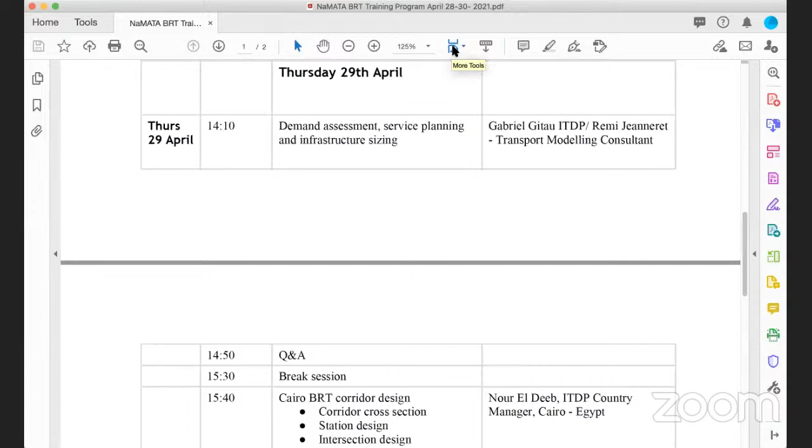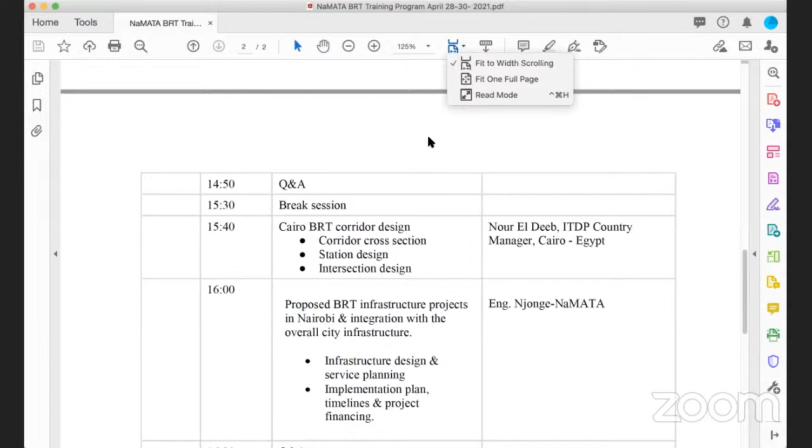Thank you. So today we'll look at demand assessment, service planning, and infrastructure sizing. And we did say that for this session, the workshop is focusing on BRT planning. Would love to tackle everything else, but it's not possible. After that presentation by Gabriel Gitau and Remi, we'll have a Q&A. Today we'll have a break of 10 minutes, hopefully. And then we'll listen to Cairo's experience on their BRT corridor design. So it would be useful for you to capture some of the expected standards for designing, and then we compare what Cairo's experience has been like.

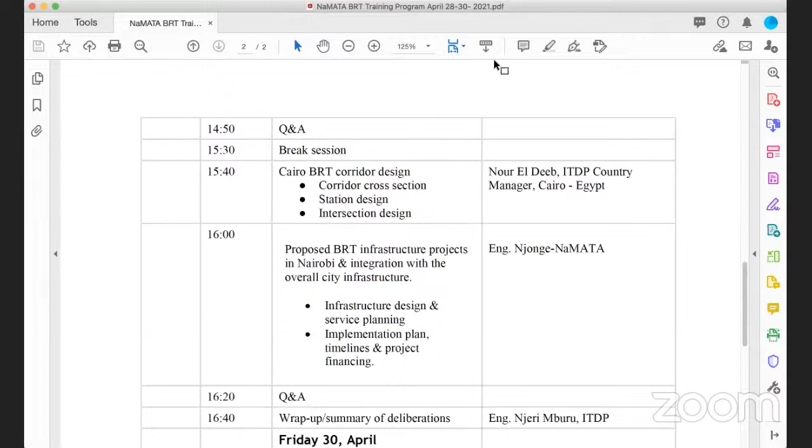At 4 o'clock, we are looking forward to having NaMATA again. Engineer Njonge is going to present to us NaMATA's infrastructure designs and service planning. And he's also going to give us a snippet of the implementation plan, timelines, and project financing. I believe this is for BRT line 2, but when we get to that, it will be clarified. Then we'll have another question and answer session. And after that, we'll have a wrap up. So that's what we are doing for this afternoon.

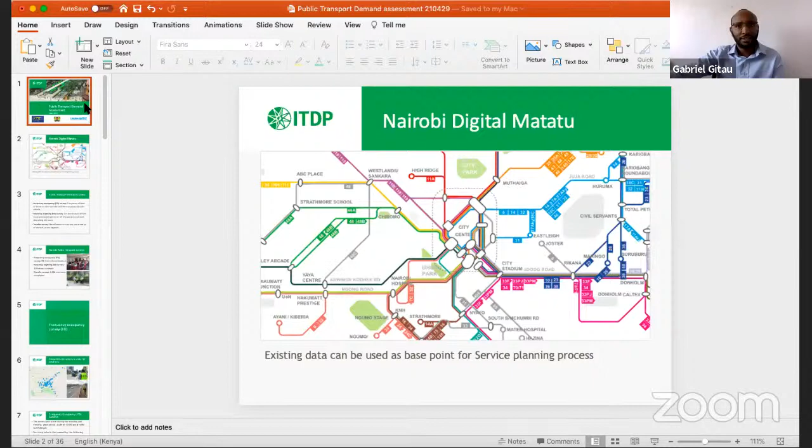So just confirm if you can see my screen from your side. Yes, if you could put it on full screen.

Okay, thank you. So I'll take you through the public transport demand assessment. This is the initial step that you take whenever you're doing your public transport planning. The demand assessment gives you an estimate; you're able to find out what is happening on the ground, the current trips which are being made. And I'll take you through the process of how you collect data, and our transport modeler is going to take you through the modeling exercise. I'll give case studies from Nairobi. We did an exercise in Nairobi and also in Mombasa.

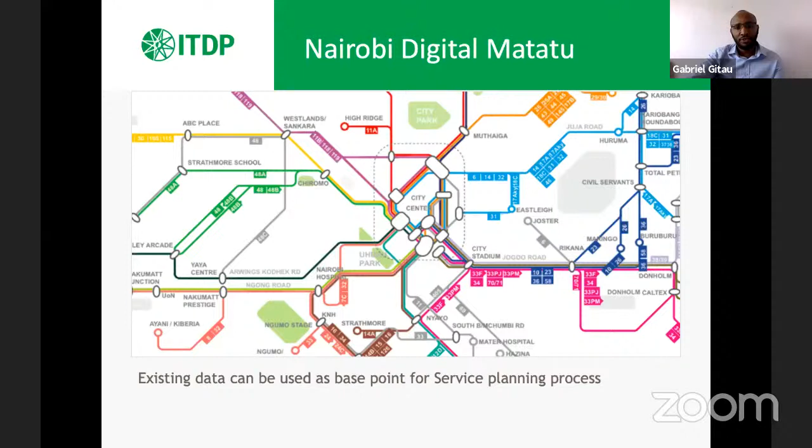So for Nairobi, we were lucky, we had the Digital Matatus. This is an online platform which had all the existing matatu routes. So Digital Matatus had given all the existing matatu routes which are in operation in Nairobi, and this was the starting point of our data collection process.

For the public transport demand assessment, there are various kinds of surveys which are conducted. We have the frequency occupancy survey, and this is a survey which is done to determine the frequency of buses or taxis, and in Nairobi, it's the frequency of matatus which are plying the corridors, and you're also able to determine the occupancy of the passengers on each vehicle. We also have the boarding and alighting survey, and this is an onboard count of how many passengers get on and off the buses at each stop along the route.

We also have the transfer surveys, and these are done to identify the trips which are made up of more than one segment. So these are the three kinds of surveys which are very critical in the assessment of your public transport demand.

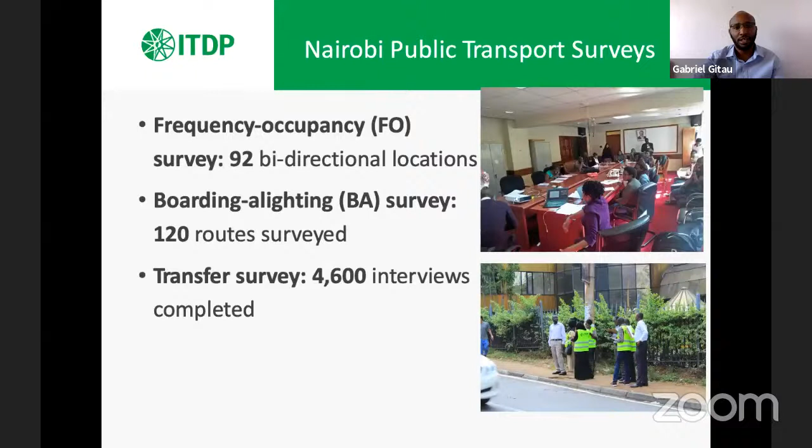For the case study for Nairobi, NaMATA, in collaboration with ITDP, conducted the frequency occupancy surveys. We had 92 locations. We did the citywide FO counts. We also did the citywide boarding and alighting surveys. The surveys were conducted on a total of 120 matatu routes that are in operation. And for the transfer surveys, 4,600 interviews were completed during the public transport assessment. I'll take you deeply into how the surveys are conducted, starting off with the frequency occupancy survey.

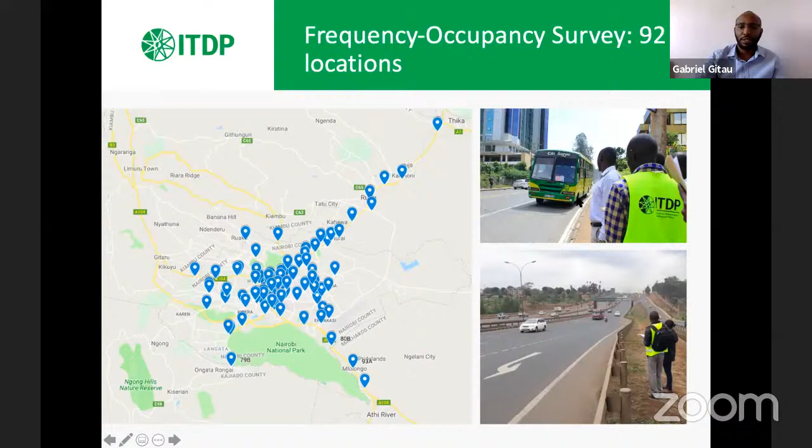This is a map which is showing the locations which were selected for Nairobi. The surveys were conducted in 2018, 2019. We had 92 locations, and these locations were based on the routes where the current matatu operations are occurring. So surveyors were positioned at these 92 locations, and they were capturing the data on the existing public transport routes. You can see this photo is showing an example along Thika Road. This is one of the locations where the surveyors had been located and were capturing the data.

So the frequency occupancy surveys were conducted during the morning and the evening peak period, that is from 6 a.m. to 10 a.m. in the morning, and in the evening peak period, between 4 to 7. And for the survey methodology, the surveyors were capturing the details of the public transport vehicles which are passing the count location. For each vehicle that passed by, the surveyors would capture the vehicle type. They would also capture the origin and destination of these matatus. And for the case of Nairobi, we have the matatu route numbers or the sacco name, so that was being captured in the survey. The surveyors would also count the number of passengers who are on board the matatus and also record the time.

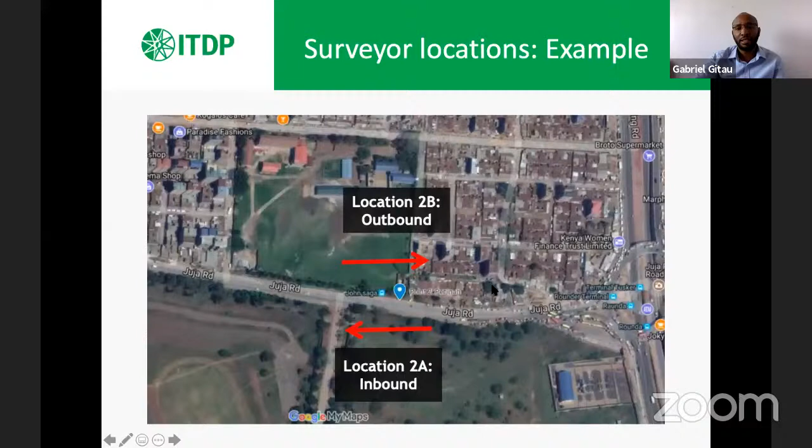So this is an example also of how the surveyors were positioned. They were capturing data in both directions. This is how you capture data: you capture data both in the inbound and the outbound direction. So for each survey location, surveyors are positioned on both sides of the road, and they capture all the public transport data of the vehicles which are passing that survey location. For counting the passengers, you do a quick count on the number of passengers who are on board. And if most of the seats are empty, you just do a quick count of the number of passengers who are seated in the matatu.

Then if most seats are full, you can count the empty seats, do a quick math and subtract from the total number of seats in the vehicle, and you'll be able to determine the number of passengers who are on board. Then if all the seats are full, sometimes you can have a corridor where we have even standing passengers. The way you obtain the occupancy is by counting the number of standing passengers, and then you add that to the total vehicle capacity.

So this is an output from the surveys after conducting this frequency occupancy. It gives you the existing public transport demand, and you're able to determine the number of passengers who are using the public transport vehicles along your corridor. So this is an example. This is the survey output from the frequency occupancy. This is along Thika Road.

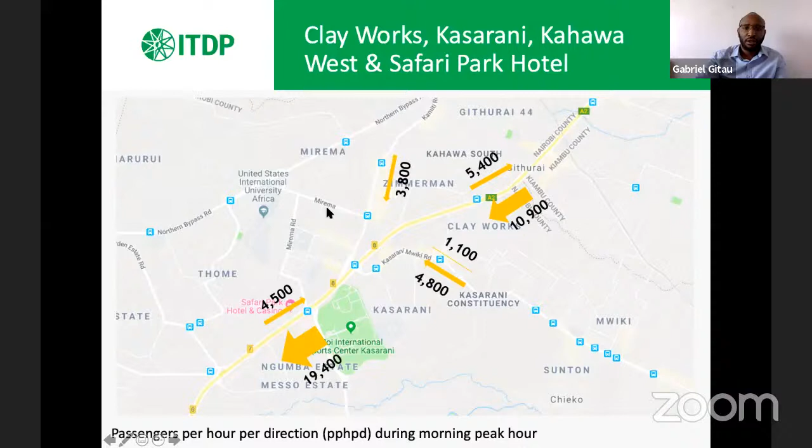We had counts near Clay Works at Githurai. You can see the numbers were about 10,900. And as you go towards town, the figures kept on coming up. Also, if you compare the inbound versus the outbound, this was the morning peak period, and you can see the survey output indicates that the inbound traffic was heavier compared to the outbound direction. This was another survey location at Roasters, also along Thika Road.

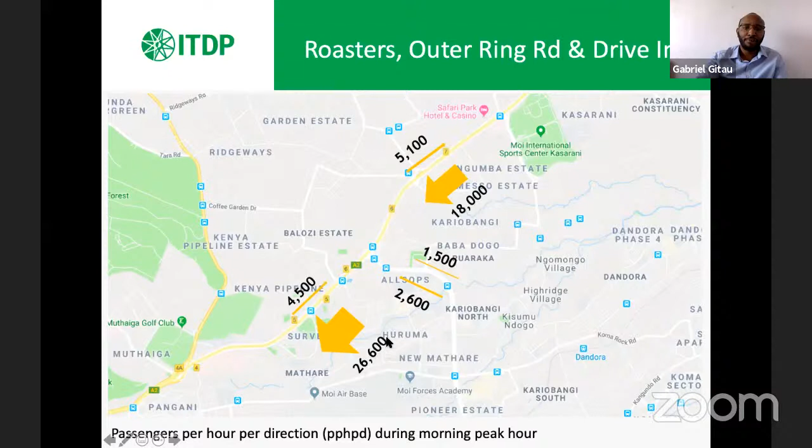We also had surveyors positioned near Allsops along Ring Road and at Drive-In. And this is the area where we had the highest volume of observed passengers, where 26,600 passengers were observed during the morning peak period. That is during the peak hour in the morning. So as you can see, as the traffic keeps on coming towards town, our corridor, that is the Thika Road, has got a very high passenger demand of up to 26,600 passengers.

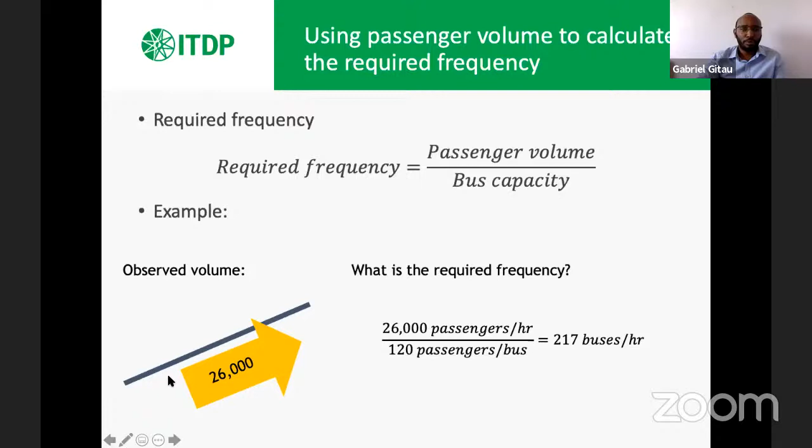Once you've obtained the public transport volumes, the passenger demand, you can use that data to determine the frequency of buses if you want to introduce maybe a bus service. The number of buses required is based on the observed volume against the vehicle capacity. So for example, if you observed a volume of about 26,000, you'd be able to determine the frequency, how many buses would be required along that corridor. Assuming a bus capacity of about 120 passengers per bus, along that corridor you'd require 217 buses per hour to handle this demand.

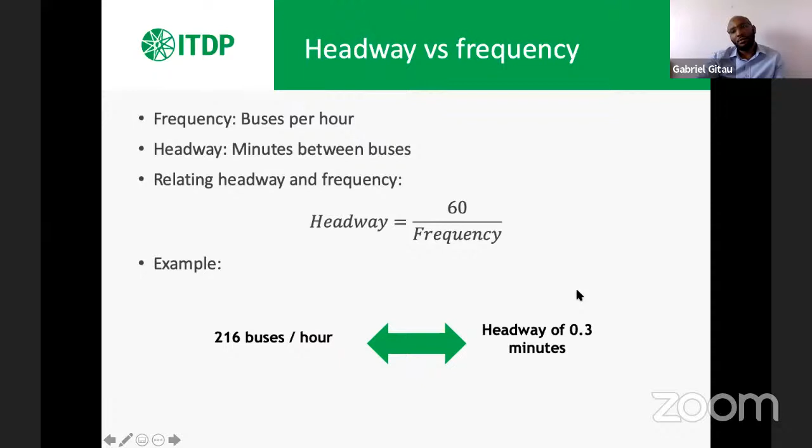The other comparison is the headway versus the frequency. The frequency gives you the number of buses which are required per hour, and the headway gives you the interval at which these buses will be docking at your station. To determine headway, it's 60 minutes, since 1 hour has 60 minutes, divided by the bus frequency. So for example, if you have 216 buses passing a location in 1 hour, these buses would have a headway of 0.3 minutes.

The other data that you obtain from your surveys can be used to compute the width of your stations. And this is the formula which is used. You require 1 meter of width for your infrastructure, that is 0.5 meters for the wall and fixtures on either side. Then you also need to determine the width required for the passengers waiting in the inbound direction, the width required for circulating passengers, and another width for passengers in the opposite direction. So this is the formula that is used to compute the width of your station.

These formulas were there during yesterday's presentation. Chris presented the NaMATA BRT framework. So these formulas are there, and they're also in the BRT planning guide. So we did an example to determine the width requirement on one of the stations along Githurai.

The proposal is to have a staggered station, and we found out that for any given time on one substop, you'd have about 95 passengers waiting between the bus interval. So the waiting passengers would require a width of 1.6 meters. Then the width for the circulating passengers would require 1.62 meters. But in the opposite direction, there will be no width requirement because the station is staggered. And with a staggered station, the docking, boarding and alighting occur on one side.

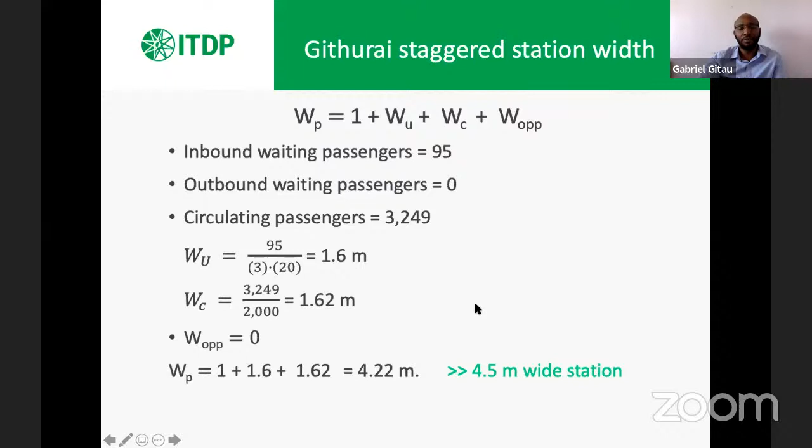So for Githurai, based on the existing demand along the corridor, you require a station which is 4.5 meters wide. The other survey conducted to determine the public transport demand assessment is the boarding and alighting survey. This is an onboard survey which is done to determine locations where people are boarding and alighting. And I will take you through the survey methodology.

We also conducted this survey citywide in Nairobi and also in Mombasa. The surveyors are positioned near the door, and the surveys are done on board. So the surveyor sits near the door, and for every stop where the buses stop, the surveyor captures the number of passengers who are boarding and the number of passengers who are alighting at that stop, and also indicates the name of that stop. So this survey is done on board. You do a complete round trip from the point of origin to the point of destination.

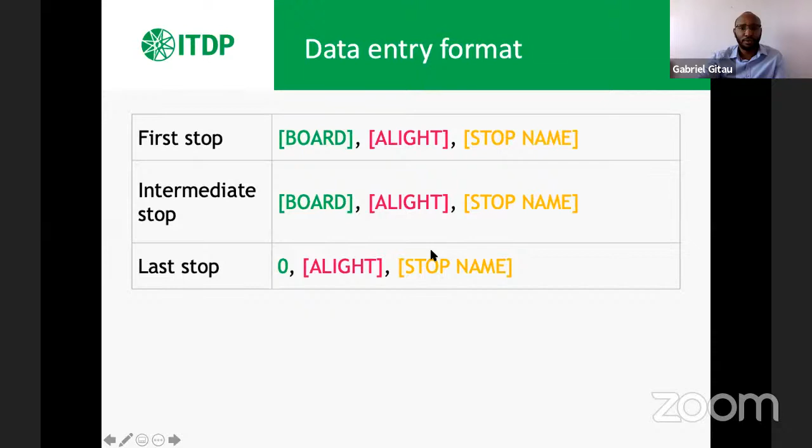This is the format in which the surveyors were doing their data entry. For the first stop, you count the number of passengers who board. You also count the number of passengers who alight at that point, and then you indicate the stop name. You repeat this for all the intermediate stops up to the last stop. At the vehicle destination, the number of boardings would be 0. Then you capture the number of people who alight, and you also indicate the name of that stop location. So this is one complete round trip. It consists of complete inbound and outbound trips.

So for example, if the trip is coming from Thika to Nairobi, a complete round trip would be from Thika all the way to Nairobi, and then from Nairobi back to Thika. We completed 5 round trips for each route in the CBD. So one complete round trip comprises from the point of origin to destination, and also back to your point of origin.

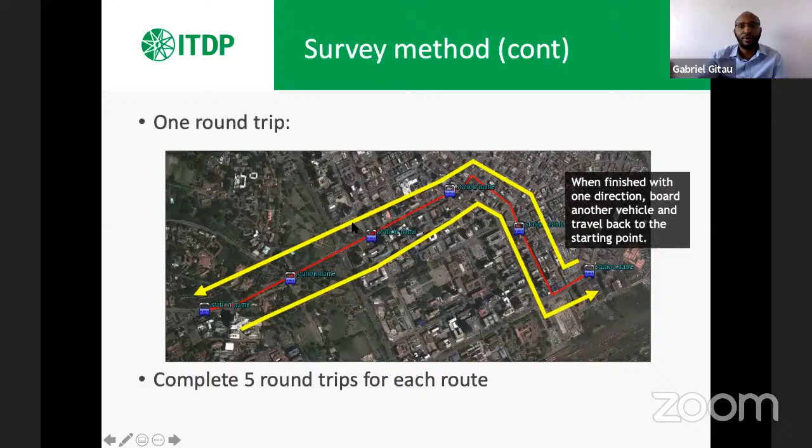For the data collection process, we're using GPS-enabled devices, and these are the applications which we use to capture data. We used Locus Maps for Android phones, and for iPhones, we're using My Maps. These are free software. You can easily download them online and use them to capture your data. This is an example of how the surveyors were able to pin down the waypoints along the survey route. For each location where the matatus were stopping, the surveyors would drop a pin, and you can see where most boardings and alightings are taking place.

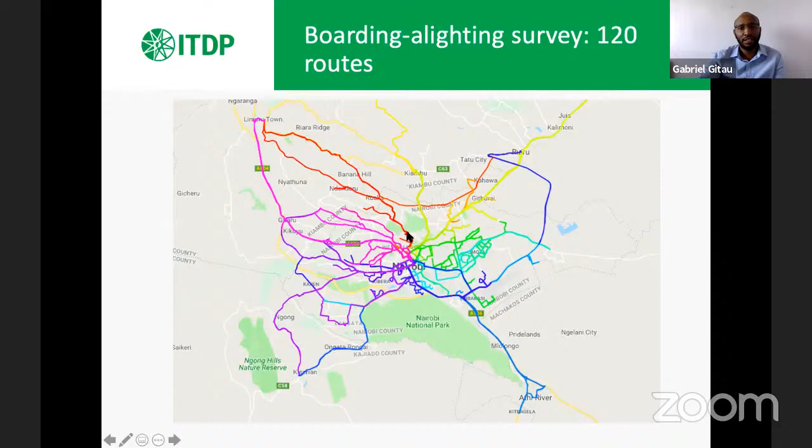These are the routes which were surveyed in Nairobi. We had a total of 120 routes surveyed, and they mapped out all the boarding and alighting locations in the entire city. The other survey conducted is the transfer survey. Assume we have someone who is coming from home and needs to go to school. Mostly what happens, you find that there is always a transfer point.

The reason why we conduct these transfer surveys is to determine the locations where most transfers are occurring. You can also introduce a direct service from the output, and this will minimize the need for that transfer. So by conducting the transfer surveys, you're able to know where people are coming from, where they are going, and determine the transfer points along the road.

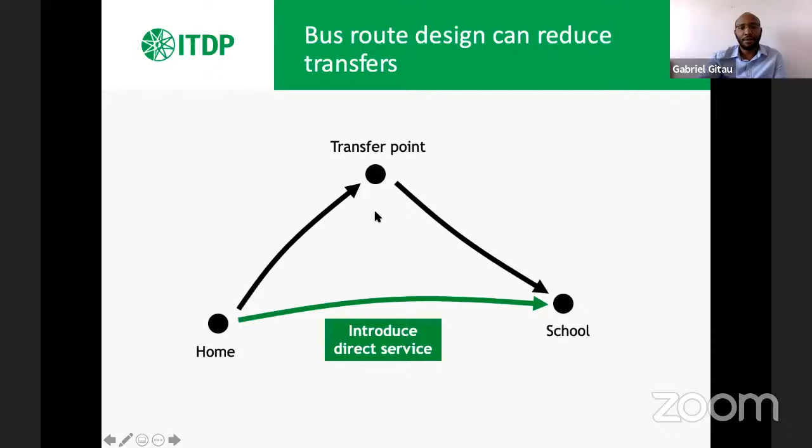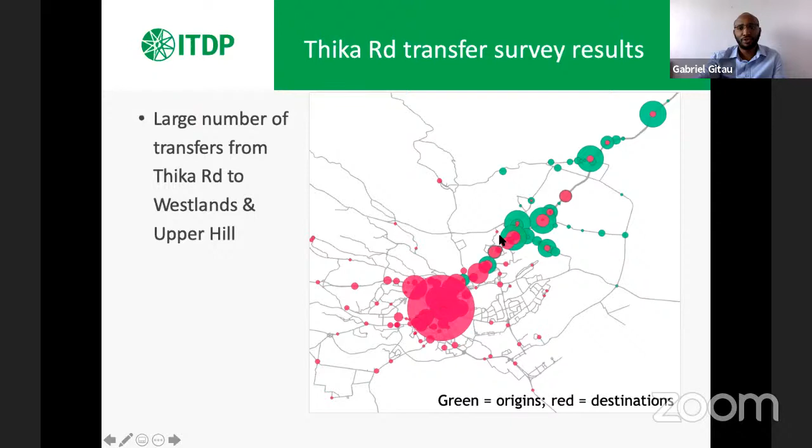This is the output from the transfer surveys in Nairobi. The output indicated that for most people transferring along Thika Road, most of the trips are headed to either Westlands or Upper Hill. But currently we don't have those direct services, so there is a service which can be introduced, and it would minimize the need for transfers in the CBD.

Some of the challenges encountered during the data collection: Thika Road is one of the heaviest. The corridor has a very heavy traffic flow, and it was quite challenging for the surveyors to capture all the vehicles passing the survey location and also determine the passengers on board.

We also had passengers who were not willing to undertake the interviews during the boarding and alighting surveys. Security incidents: one of our surveyors was mugged when we were doing the surveys in Mombasa. We also experienced some hostile passengers, and they were giving some responses which were not valid. So those are some of the challenges that we faced when conducting these surveys.

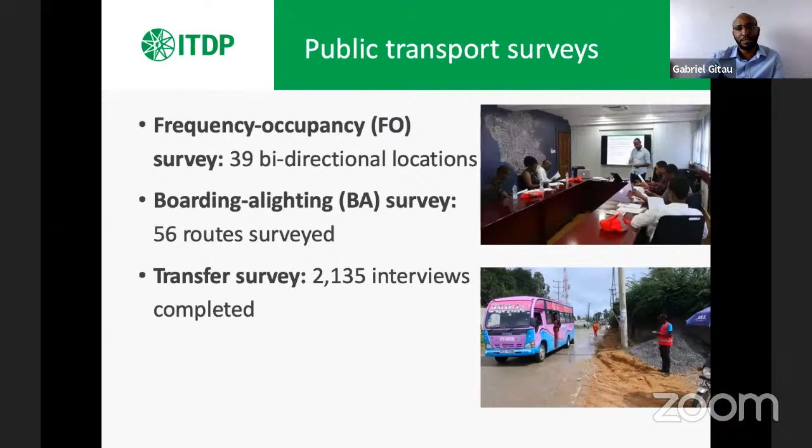The survey output: these are the volumes, the passengers per hour per direction during the morning peak period. And we found out that across the Nyali Bridge channel, that is where we have the heaviest volume of traffic during the morning period, as this is the only access into the island from the north. We also had a high volume of passengers, about 4,800, from the ferry terminals. At the Causeway, the volume was about 3,100. And in the CBD, near Marikiti area, the volume was about 5,700.

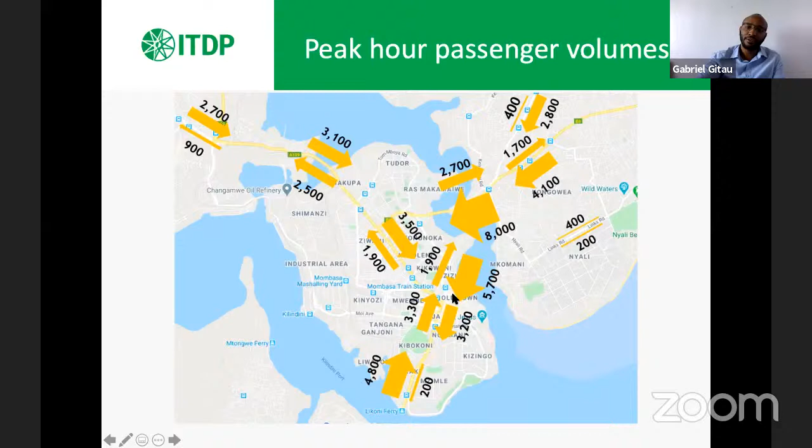We also conducted transfer surveys, and 5 major transfer points had been located in Mombasa. These are the locations where most passengers and pedestrians tend to make their transfers. There was a station at Ferry, Posta, Mwembe Tayari, Sabasaba, and also at Lights. From the transfer surveys in Mombasa, we were able to determine where the trips are originating from. This is an output of the transfer surveys through Posta. The green is the origin of the trips, and most people who were making transfers at Posta were either headed to the ferry or towards docks, that is towards the port.

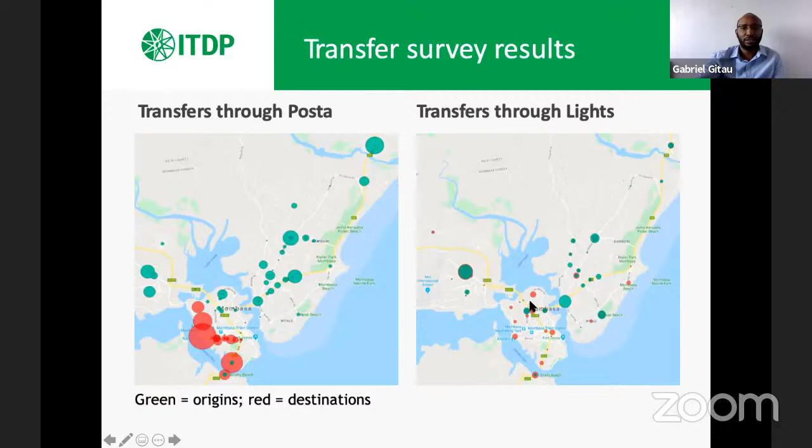Then we also had transfers at Lights. Most people were destined either towards Magongo area or towards Kongowea Market in Mombasa. And that is how we conducted the traffic demand assessment. Now I'll invite our transport modeler, Remy, to take us through the service planning and how we do our infrastructure sizing. Thank you.

Hello, everybody. My name is Remy Jameret. I'm a transport planner and modeler. I work with ITDP in different places and here in Kenya. And we developed a methodology to be able to get a model through all the data Gitau presented. Because in a lot of places we don't have information available, like a household survey, or in fact we don't have an OD matrix. So we developed a methodology to be able to generate a matrix based on this information.

And this process is very detailed and efficient because we are based on those surveys. Basically, we are based on the boarding and alighting survey, which is a very precise survey. At the starting point, we don't use a specific zoning. We base the analysis on the stops where people board and alight, and then we can aggregate later if we want. But we get very precise information because all is based on boarding and alighting.

In fact, what we do is use the actual demand and dimension the system with the actual demand based on actual numbers, and we include some reserve of capacity to be able to grow with normal growth. So by now we didn't go through this exercise of estimating future demand, which is something we can do later and discuss with authorities about all the hypotheses we can consider or not. But by now, with actual demand, we are able to dimension the system and to propose, to recommend what we need based on the demand.

So this is the step we do by now. Then with this, once we got the matrix, we introduce the future network, so we propose some scenarios.

We have done Thika Road in Nairobi, where we worked a lot on different configurations. We have a very high number of passengers in Thika - with the proposal, we are around 30,000 pphpd, so it's a very huge corridor. Based on those numbers, with the modeling, we know all the boarding and alighting by station and the frequency of the different routes, so we propose different operational designs for each situation.

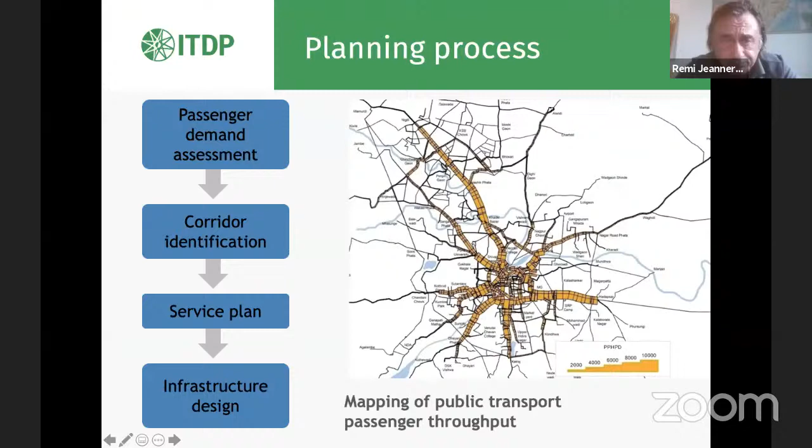So in the case of Thika Road, we simulate some express services. We plan to do a BRT corridor with a passing lane at stations because of the very high volumes. We got different kinds of services which are express, and we also check some direct service to other parts which were identified in this transfer survey. For example, in Thika we had a lot of trips in the AM peak with destination to Parklands and Upper Hill.

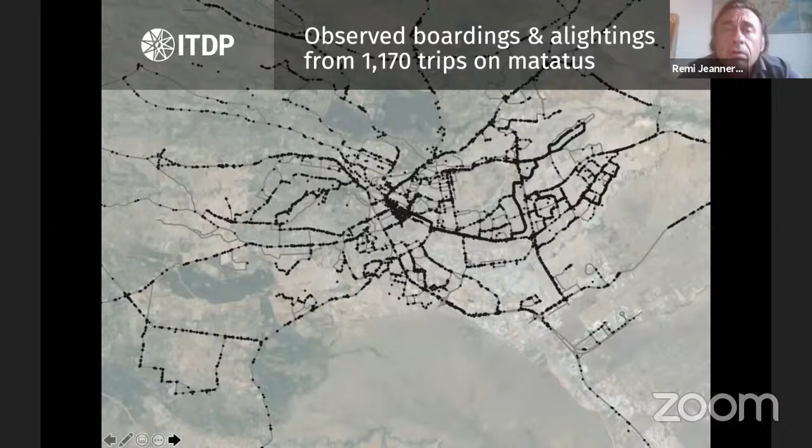So we introduce different kinds of... okay, those maps here - this is where the boarding and alighting were observed. All this is introduced in the model. So this is the basic boarding and alighting survey that we expand with the frequency of each route direction. So this map here shows the boarding and alighting that are directly extracted and expanded from the survey.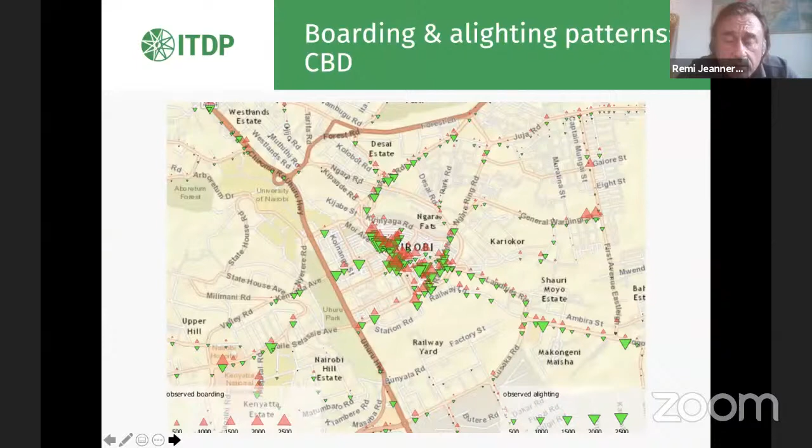As I was telling you, this is very precise information. You got really the location where the people use the bus, which is very useful. We can aggregate this later. Okay, this map here is...

Another point which is very important in the model is to define the speed, because with the actual speed, a map like this is already a kind of diagnostic, where the speed is very low. We can identify the worst places. Of course, the most benefit of the project will be where we got the lowest speed.

The speed is also very important to estimate the benefit of the project, because this is how we calculate the total time offered by the new project. We can compare with the actual situation. So this information of speed is really crucial, and we got this information.

It depends, but for example, we can get this from GPS, and this is also very precise information, linked by direction. We cannot use in a model a global speed or something like this. It really doesn't work. So this is really precise.

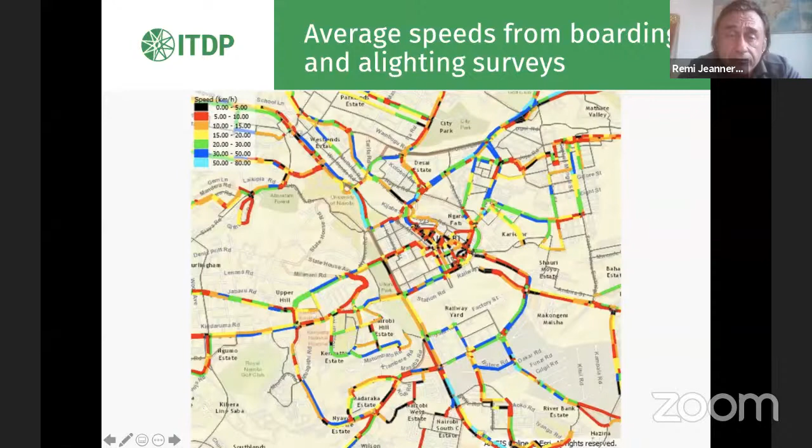Another way to obtain this information, if we don't have GPS data, is for example with the boarding and alighting survey, we can register the time. So we are able, based on the boarding and alighting survey, to also calculate the speed along the itinerary of each route. This is a survey, we got different ways to obtain it, and we need also something very precise.

So after all this, we of course do the calibration for the current scenario, where we compare the number of passengers on all the principal roads with the model passengers. We adjust this model to calibrate it to represent the actual situation. Then we can model and test some different scenarios for the future. So I think that this is the calibration.

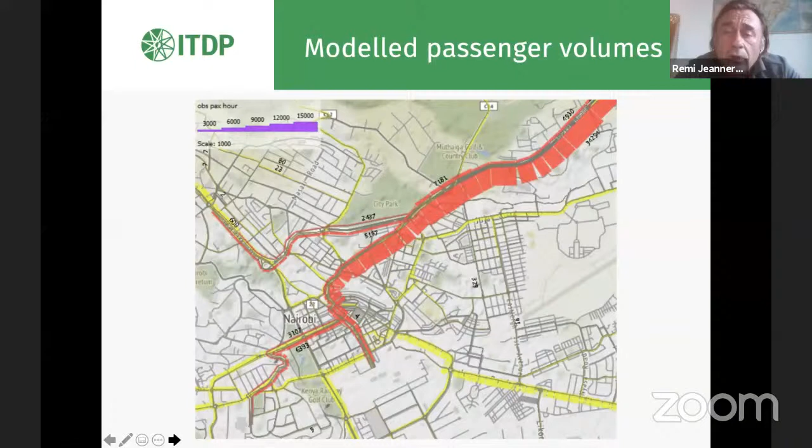So this is a proposal for Thika Road, where you see we had like 34,000 pphpd. It's very high. Also here we join different routes from different neighborhoods to run along Thika, so of course it increased the number of passengers compared to the current situation.

We proposed different routes, and these are the routes. You see all these neighborhoods, we take some passengers from different places where actually they maybe have another option to reach the downtown. So this generates those volumes.

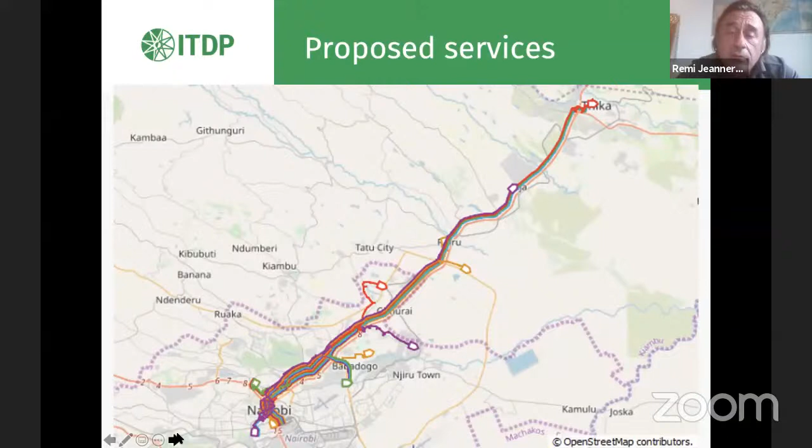Once we got the volume of the infrastructure of the proposed BRT, we can, in fact, dimension the system based on those results. So of course, the dimensioning of the system depends on what kind of operational design we propose.

So this is an example of routes that is proposed for the BRT: fleet size, frequency. In this example here we got maybe 12 routes or something like this around Thika Road. So this is another one.

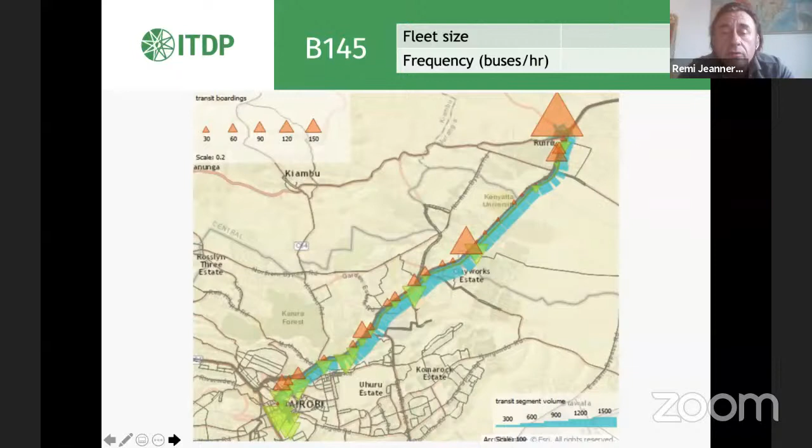So each of the triangles are boarding and alighting. This information is used at the end, the boarding and alighting for each station, to dimension the station. Gita told you about the dimensioning of the station for the height of the station. But here we're talking about how many substops we need, what is the configuration, what is the saturation at the station, and if we need an overpassing lane or not.

So we had discussion recently with different people about Thika Road, about the project we need to implement there, because based on all the simulation we had and all the different scenarios we could run, one thing that really is the conclusion is that the volume there really needs a BRT with very high capacity, and we really need to have an overpassing lane and an infrastructure which allows to grow and to also develop the system in different directions in the future, to join with other corridors.

And really incorporate Thika Road in a network. So this slide here is about the design. Of course we got different ways. We got the trunk and feeder way, which is what's used a lot, and it is still used, because in fact in the BRT system you got a lot of considerations to take into account. So some places like in Bogota, in Transmilenio, you got a trunk and feeder service.

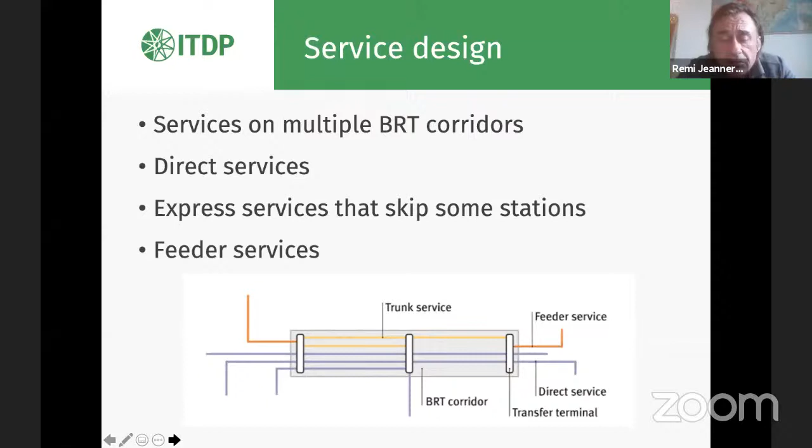This is the case here in Nairobi and also in Mombasa, where we have only direct service. We don't have trunk and feeder in this situation.

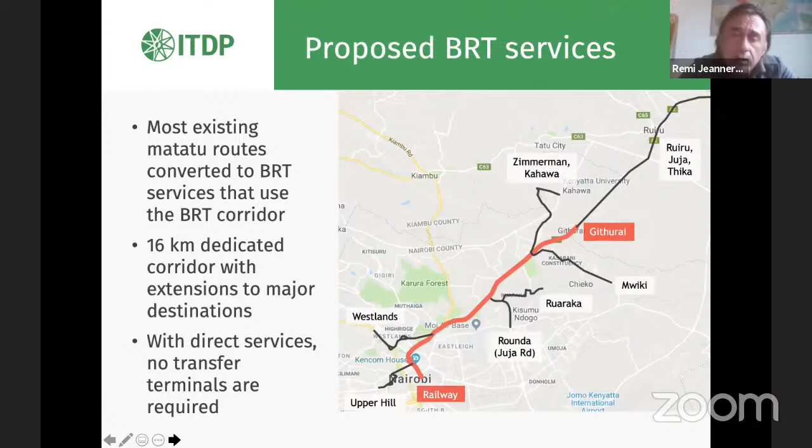So what we have done for the proposed routes is basically base this analysis on existing routes. We join some existing routes or extend some of them, using actual routes in the different neighborhoods. Here you can see Mwiki, Zimmerman - all of these are existing routes. We keep those itineraries of existing routes and include them in the BRT lane.

We also have direct service crossing downtown. So we got 12 routes in this system.

In Bogota it's a little specific case, because we have a passing lane all along the way, which is not needed for Nairobi, but we definitely need passing lanes at stations and several sub-stops.

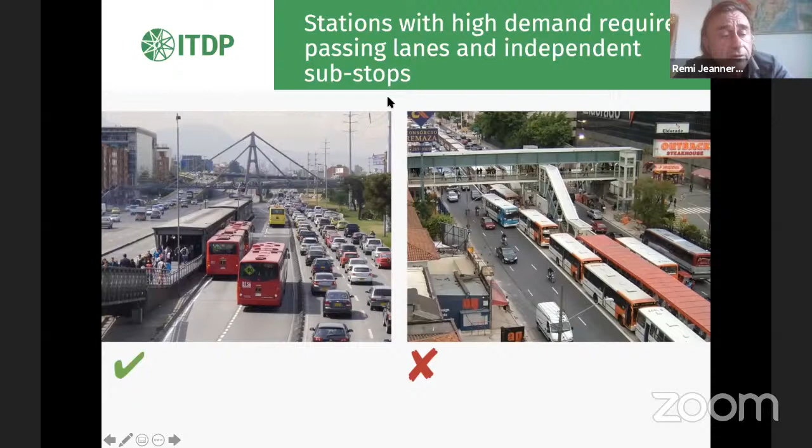For this project, we estimate dimensioning for stations. This is a scheme for high-demand stations, explaining how buses stop - at each stop you can stop 2 buses. This way of keeping 2 buses at each stop allows you to increase capacity a lot, in fact around 40% compared to having only 1 location per stop.

And what we need to define is how many stops we need. So this is Dar es Salaam - we also worked with ITDP for the BRT in Dar es Salaam.

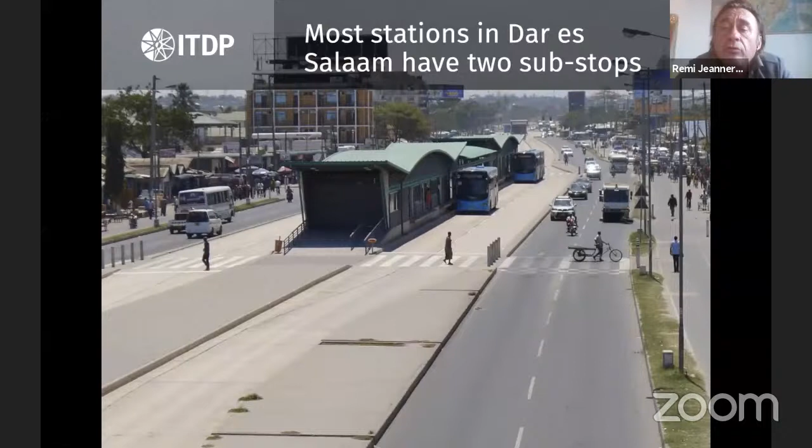We also made a model there, which wasn't exactly the same methodology, because in Dar es Salaam the matrix was based on an onboard survey, which already included the transfers. So it was a little different, but it was also a good matrix that we have there.

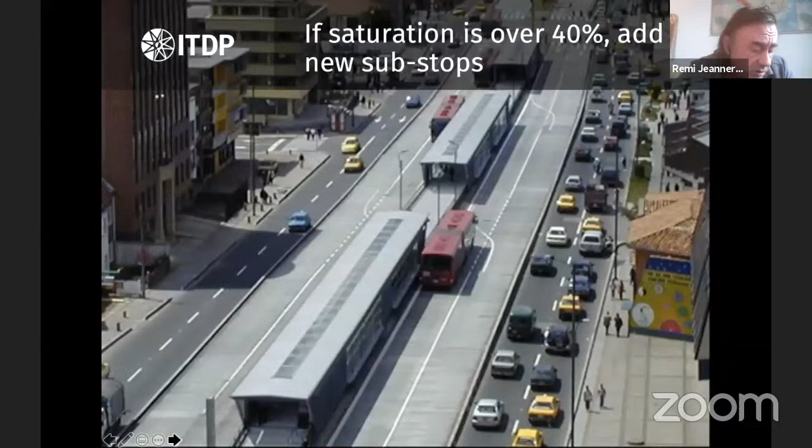In Dar, it's the same situation - we have overpassing lanes at each station, unless in downtown where we have a lot of restrictions, so we don't. But globally, everywhere we have passing lanes.

This is something we estimate directly from the model. The saturation that we use to estimate the number of sub-stops is 40%. This is based on observation, defined after Bogota was implemented, and then confirmed in a lot of different BRTs around the world.

This is the saturation you need to use to dimension. You need to dimension at low saturation to account for all the irregularities you can have in a very concentrated peak. So dimensioning needs to be made at a low saturation of 40%, and in this table we see how we calculate this dimensioning.

All of this is extracted directly from the model - this is information that is output from the model. We get boarding and alighting, inbound and outbound each direction. Then we get the frequency of the buses, and we define for the routes which type of bus we need. Then we calculate the saturation, based on the number of boardings and alightings and frequency at stops and stations.

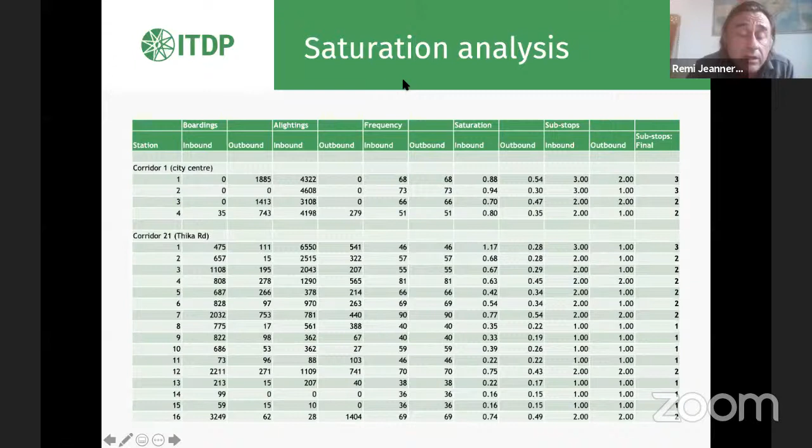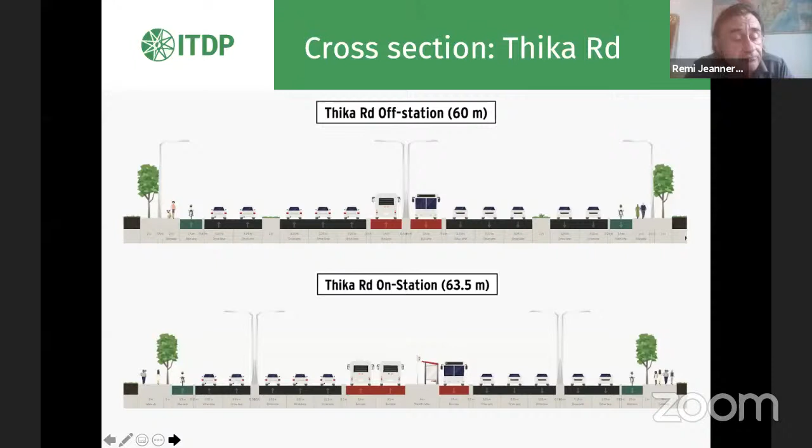So this is the cross section in Thika Road. What is proposed? So you see the way we can reduce the dimension for the BRT is to offset the stations. We don't have a specific problem. We got one lane by direction, and for the stations we can split the stations so that we can have only 3 lanes instead of 4 lanes. So we can win some space in this situation.

You see, this is okay in an avenue where we got space. So here we got a central station with 2 lanes on each side. And in Thika Road, we got some stations which are split, and we got only 3 lanes.

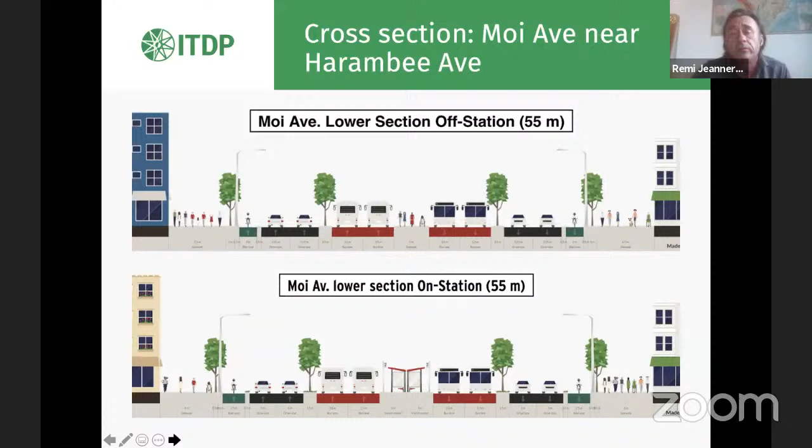So we always, depending on the demand and the numbers we have and the conditions in the situation, try to find the solution which best corresponds to the demand and the local conditions. So if we need to split stations in a lot of places, we got this configuration here with 2 lanes in one direction and 1 lane in the reverse direction, which allows us to implement a BRT with high capacity, and we can reduce the dimension of the infrastructure to allow the other lanes for cars and general traffic.

So okay, Remi, we are running out of time. If you could summarize, fine, please. Yes.

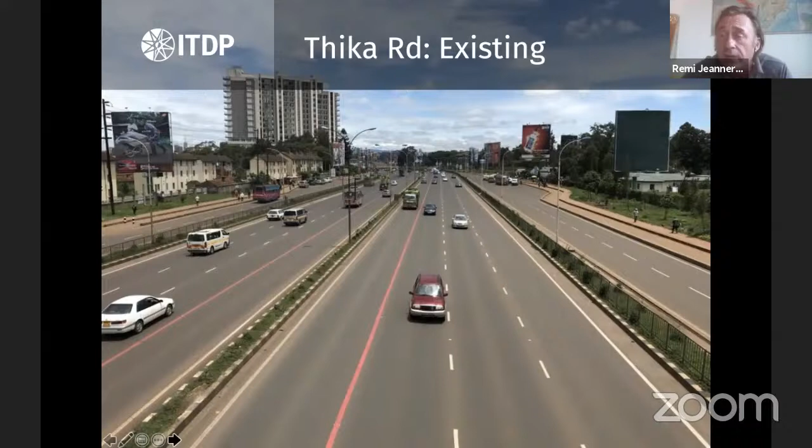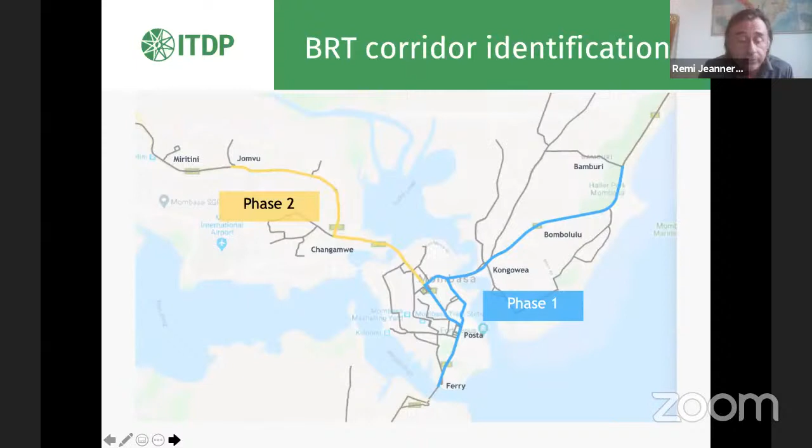So that's all the process we have done. What I want to say is that building this model and this database takes time, but once you have done it, which is the case now, you can simulate a lot of things, whatever you want. So we have done some different exercises in Nairobi, for example, with another corridor with Juja Road, and we have done some other simulations based on proposals that were done, like the Matatu ban in the city center.

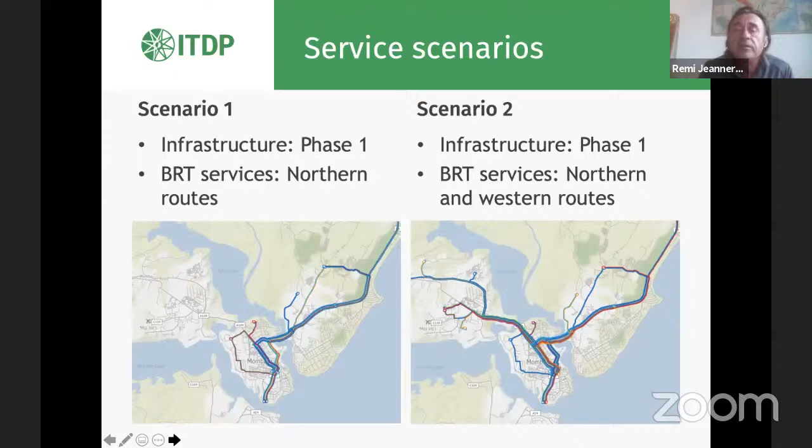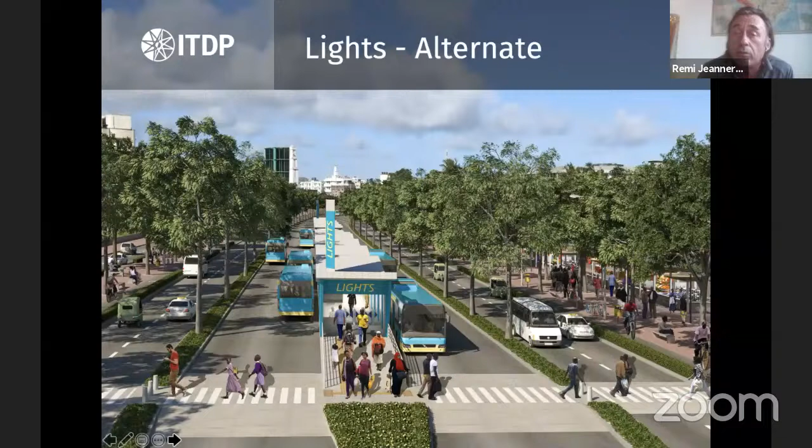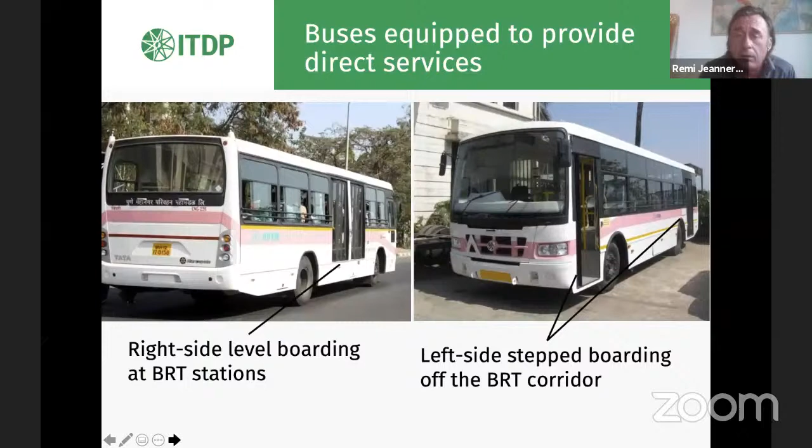So we have done different exercises and simulations because we got a model which is totally ready, and we can run every corridor everywhere in the city. So this is now very useful, because very quickly we can get answers, like, let's do the Matatu ban. Maybe that's not the idea. What should we do? What should we test? We can test a lot of different scenarios and compare and really decide which one is the best. So that's the exercise we need to do now, and we got everything ready to do this. So that's now the interesting part.

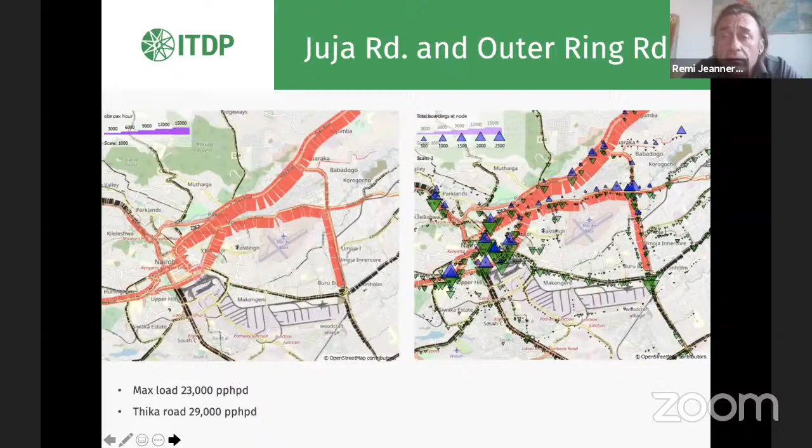So here you can see this is an example of Juja Road, with a proposed BRT, an estimation for this corridor. So this can be done for all the city. And these are some results of the model on Thika and Juja. So that is what we got for the modeling.

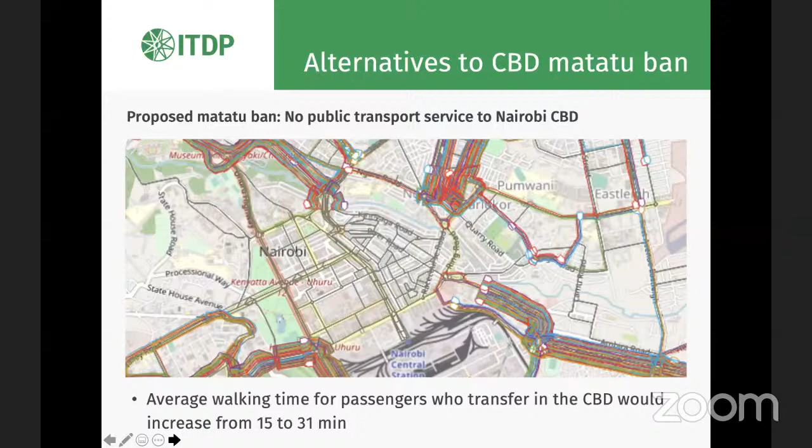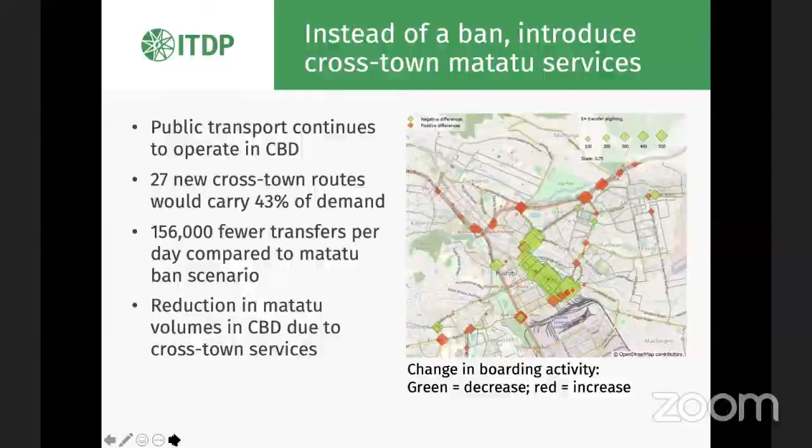Thank you, Remi. Thank you, Gabriel. Like I said, this is going into depth, and I'm hearing them say that they have all the simulations for the whole city, but I'm sure government is not prepared to work with the whole city. I think we are doing a level of piloting and experimenting, beginning with BRT line 2, but that was indeed very, very informative.

I'm sure we have some questions that people have raised that I'd like you to dive into immediately. So if Gabriel can start us off, and maybe my first one, given that your modeling was done on the corridor Thika Road, and you've recommended a certain level of service with, I think, over 100 buses, if I'm not wrong.

If government is not able to implement it at full scale, how can we address it incrementally and still get the full scope of the desired standard of the BRT system? You know, the important thing, I think, is the infrastructure, because in different places, when we discuss this, we always say, let's do only one lane and one station without passing lane, and we will do some regulation or something like this, which was some proposal that was done for Juja Road.

You know, if you have a system like this with one lane, and you are blocked, you cannot design the routes. In fact, you are obliged to use one single service, stopping everywhere. So you don't have possibilities to change, to grow, and to find the best solution. So in fact, what is very important is to concentrate on what needs to be built, so that these infrastructures allow you to change in the future, adapt, propose other services linked to other corridors.

So hi everyone, I'm Nour Deeb, ITDP's country manager, and I'm based in Cairo, and I'm happy to be joining the BRT design workshop today with you, where I'm going to give you an overview of the Cairo BRT designs and the steps that we have gone through.

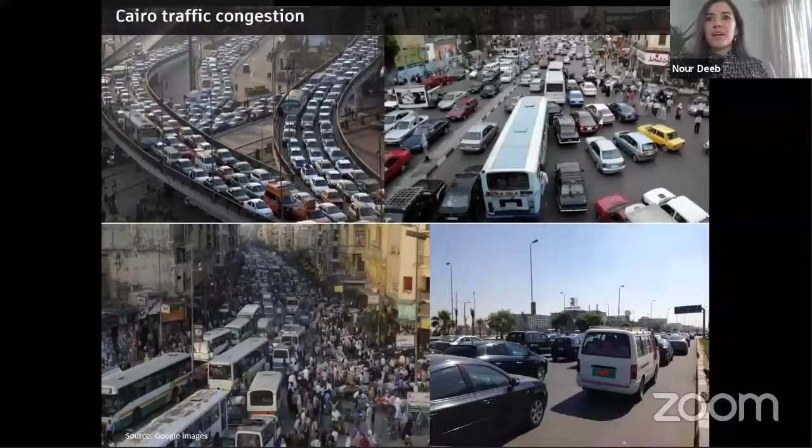So the challenges with the current public transport system is that, as you can see, it's overcrowded. There's no proper stations, so there's no orderly boardings and alightings, and also the bus terminals are not in order at all. So this is where we started thinking that we need another decent public transport system, a rapid transit system that can be more reliable, fast and convenient for the users.

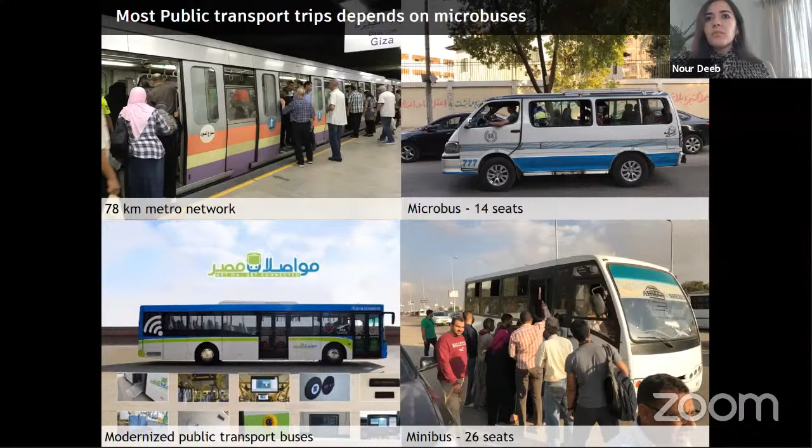So when we look at creating a master plan, we think of the RTR ratio of the city. The rapid transit ratio assesses how many kilometers of mass rapid transit you have in a city with respect to the population in millions. And we were aiming to increase the RTR to 19 by the year 2033 for Cairo.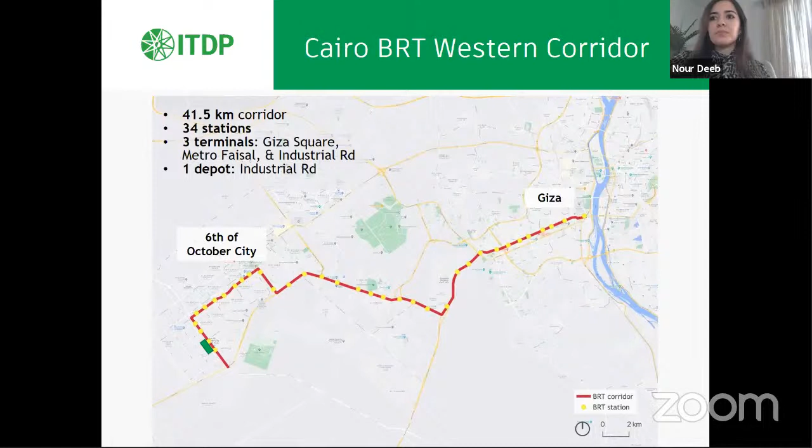So we have gone through different steps in order to come out with the designs, the detailed designs, the specifications, and also the RFPs for that project. So first we started by mapping out the existing public transport routes. And from there, we have gone through the corridor identification, the service plan, infrastructure design, and this is where I'm going to focus my presentation on, and then also highlight a few things about the financial model and the business and institutional model that we have developed.

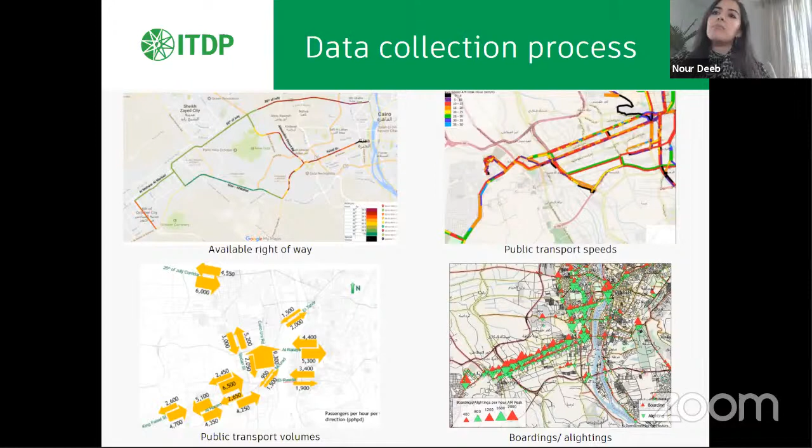So from the data collected, we were able to get valuable information such as the available right-of-way on different corridors, the public transport speeds that are currently operating, the volumes on each corridor, and also the number of boardings and alightings. And of course, all of that info helped us in informing the service plan, and that was the outcome of it. So for the Cairo BRT corridor, we're expected to have 126,000 daily boardings with a bus speed of around 21 to 35 kilometers per hour compared to current public transport speeds of 5 to 10 kilometers per hour. And we'll be requiring a fleet size of 119 articulated buses.

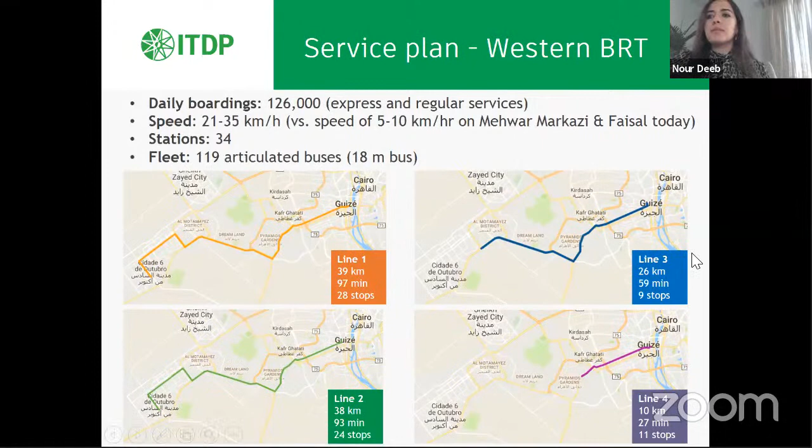So from the service plan, we were able to know how many stations we require, where we shall place those stations depending on the numbers of boardings and alightings in each location, and also what should be the size of that station. So the service plan is a very important and key step in order to form your infrastructure design and be sure that you're creating the correct design for the correct demand.

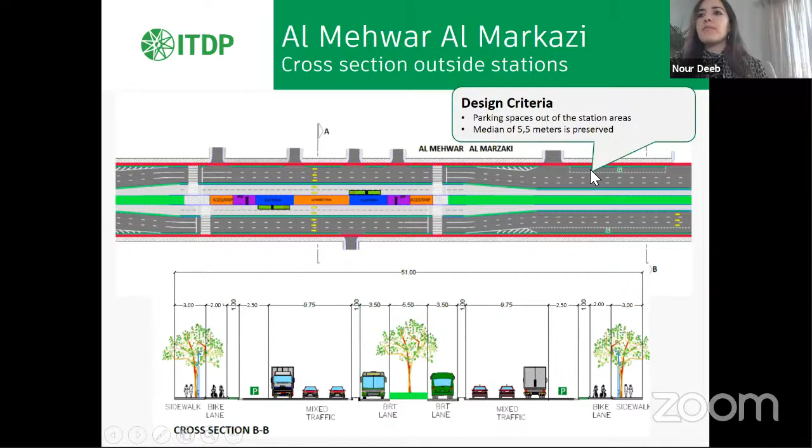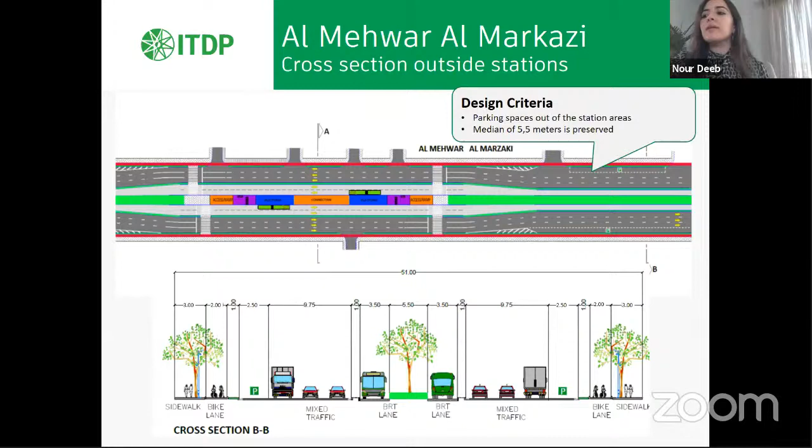So let's look at a different section of the street. So this is at section BB. As you can see, there is no station there, just the passing or the BRT lanes. And as you can see, we have added parking because there was space for it. And also we have maintained a median of 5.5 meters, which was based on the authorities' request to maintain the median that they have created. So as you can see, depending on the right of way that you have and depending on different criteria, you can design the street in a different way.

So let's move on to the station typologies. So for the stations, for that corridor, we had around 13 types of stations, but I would say there are mainly 6 and the others are derivatives depending on the right of way and many other factors. So we do have bidirectional stations with pedestrian bridges, bidirectional at-grade, and also staggered with pedestrian bridges and staggered at-grade. And then the number of platforms varies, but the maximum number of platforms in our corridor is 2 platforms per direction.

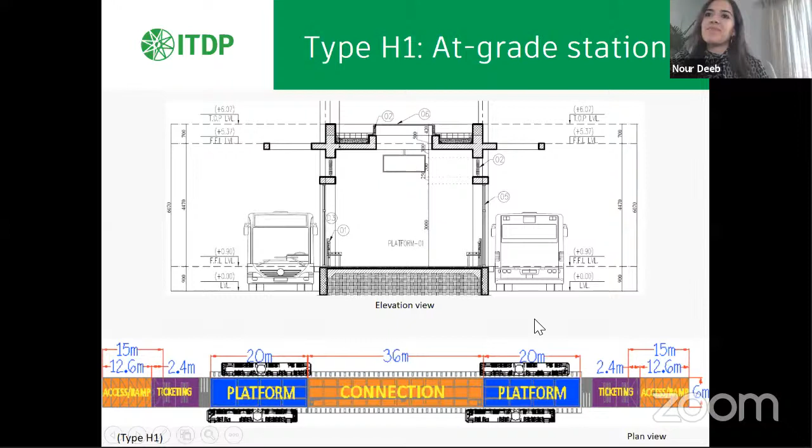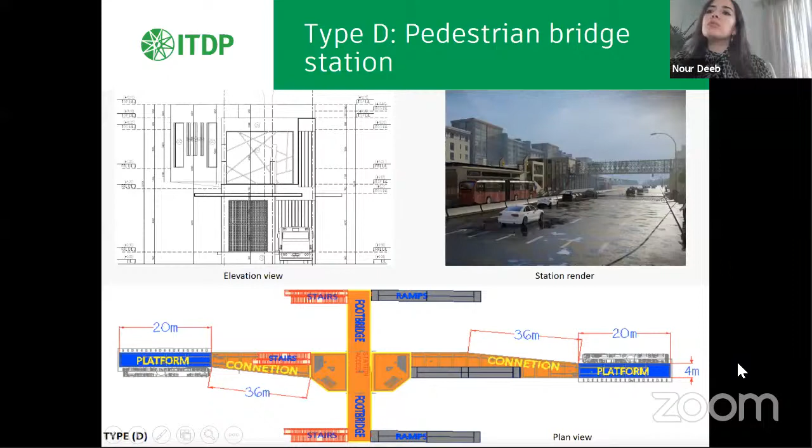So to access the station, actually you need to get into the pedestrian bridge because the ticketing area is elevated on the 2nd floor. So this is the only way where you can access the BRT station and ensure that pedestrians will use it in order to pass.

The most important point here is that the platform and the bus floor are at the same level. So we have actually designed our station to be at an elevated platform of 900 mm, so it could match with the high floor buses.

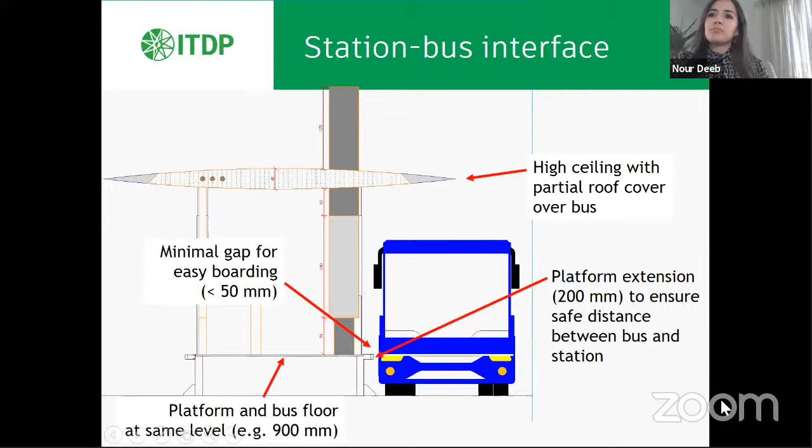And also you can see here that people are crossing disorderly, which of course is not safe for pedestrians, and creates a risk for the people driving or even the bus drivers. So after here, you can see that there is a render where we have enlarged the sidewalks where possible. We have created tabletop pedestrian crossings for people to pass safely. And as you can see, it's signalized.

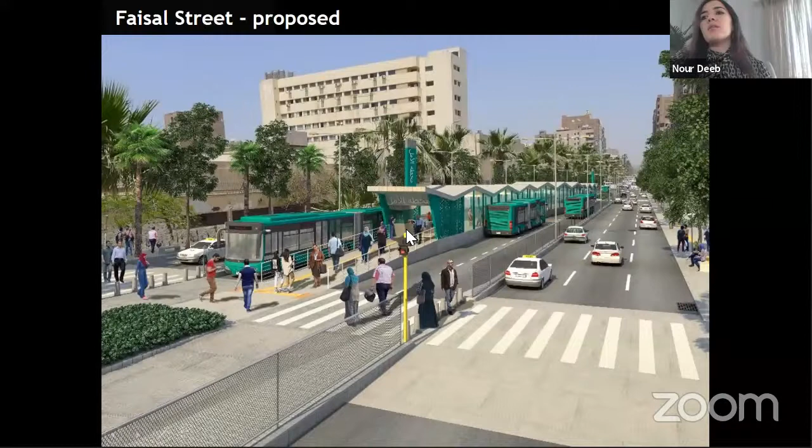Also, since this street is a very busy street and there are lots of people crossing, we created a fence so people would not jump into the BRT corridor along the way, and only opened it at the entrances of the stations so we can manage the flow. Then you can see here that there is the access ramp and people can get into the station easily with the off-board fare collection option.

And of course, this option was better, first of all because, due to the traffic counts that we have done there, it reduces the travel time for the BRT, and also it eases the traffic flow for the cars. And also, when we think about how to solve an intersection, we don't, of course, think only about the BRT.

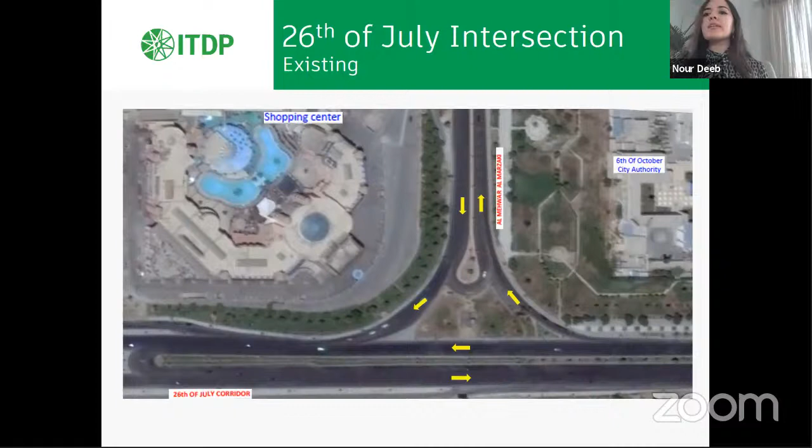As you can see here, we have also opened the left turn for cars coming from the north to the east direction. In that earlier slide, that direction was not allowed, so people would go west, do a U-turn, and come back on the 26th of July corridor. When designing an intersection, you have to think of all the modes operating. The at-grade option was feasible and has its pros and cons, and of course the flyover has its pros and cons too.

But it was the authority's decision at the end, and of course there were many factors that affected that decision. Whether flyover or at-grade, we opened that direction because the traffic counts were very high going from north to east.

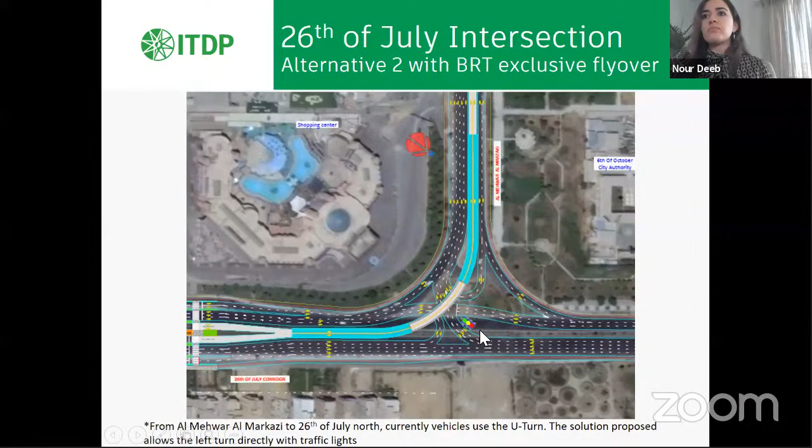So this Giza Square terminal - there is already an existing paratransit terminal there. It's organized, but not properly organized, so it's like a hub for public transport users, for transfers, for everything. It was a perfect idea to locate our terminal there.

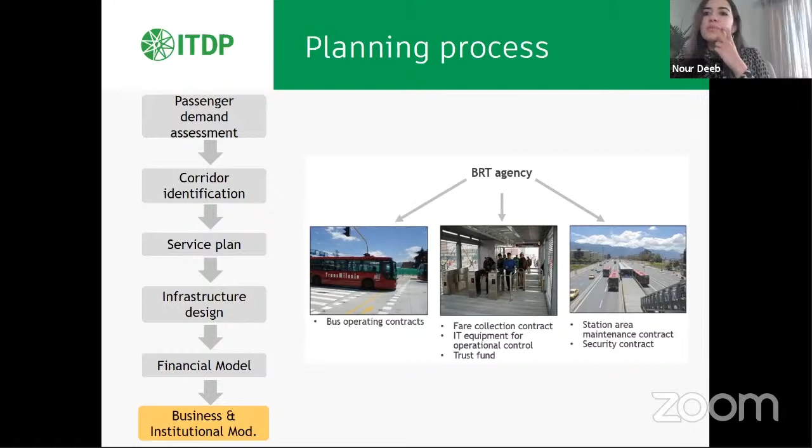Wow, very, very articulate, very clear, very comprehensive. Thank you, Nour, and we look forward to 2024 - you say that's when the corridor will be complete? Yes, of course, that's when it should start operations. The renderings will just be turned into reality.

I'm excited. I want to start by appreciating that your government is fully in control. You kept repeating that the authorities said we cannot do that here, the authorities advised that the buses should pass here, the government is going to give a subsidy - very focused leadership, and that's very impressive for planning. I also like that in your BRT designs you're very clear on the bus technology, the designs, the stations, location of the depot. This just seems to be doing it by the book.

How rich is your government in comparison to the rest of sub-Saharan Africa? This is a question I'm throwing at you as we engage with other questions. Are you saying that this will be fully government funded? Thank you.